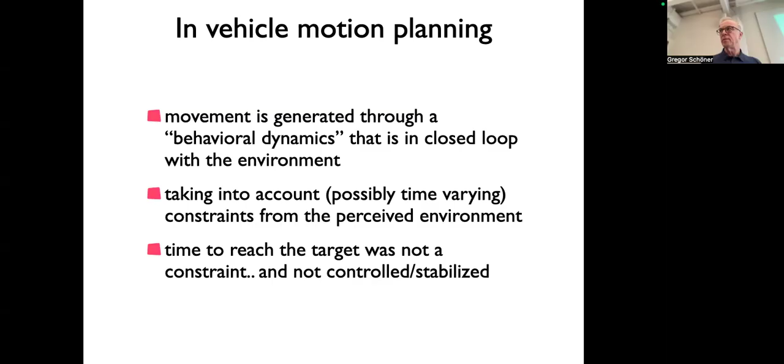So you might think, well, there's already timing in there, but there was certainly not the constraint that you arrive at a particular point in space at a particular time. For instance, if you're held up by an obstacle, you will just arrive later, right? So the speed was an independent controlled variable. That's a very common assumption for vehicle motion, and we'll see a nuance in that later.

In robotic arm movements, classically, we're also thinking about path as path planning. Some of the methods, as you saw when you read that review chapter, are the same—they're just in configuration space. And then time is a parameter, the parameter of how you run through the path.

That's then analogous to vehicles, except that in most robotic arm movements, we're not actually thinking of that time plan being updated, because presumably when you plan the path of the hand, you have the entire information about the environment, where the objects are, and so on. So it's all fixed. We'll see in a moment that's not maybe true for autonomous arms, and then we'll get back to dynamics. I'll make this problematic in a moment.

I'll talk about timing in a more ambitious sense, and that's relevant for autonomous robotics.

So here's a little guideline through what I will be talking about. I will first talk about timing in classical robots—that's really this parameterization textbook stuff—and I do this to contrast it with what is required in autonomous robotics. I'll give you a short survey of approaches to timing in autonomous robots, not in detail, just to make the problem clear.

And then I'll actually expand on how human movement is timed. That's when it will really become clear what timing is supposed to be. It's a quite ambiguous term in English—there's no good German term for that. I'll make that much clearer, define different aspects of it, and define the solutions that were developed in that domain that have to do with dynamic systems.

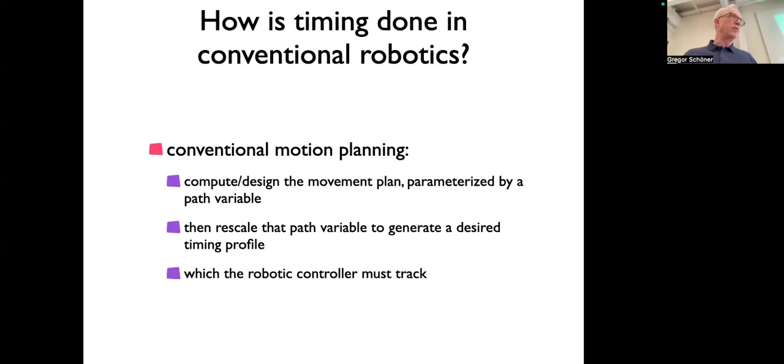And when you design them, program them, actually often people will do that first, that the robot moves slowly to make sure everything's fine, and then they just up the knob and run through it faster. So the way that's concretely done varies.

There are approaches to path planning that are in joint space or in end effector space. That's been a long topic of discussion in human movement, by inspiration from robotics, whether humans plan more in one space or the other. Sometimes a little bit odd, that discussion. In robotics, typically we're looking at non-redundant systems. So there's a one-to-one relationship between a joint trajectory and an end effector trajectory, right, which is invertible. And so it's really more a question of how parametrically these paths are defined.

Typical approaches would use straight lines as paths when there's no obstruction in the space in which you represent the movement. So for instance, if you do it in joint space, a straight line in joint space amounts to a curved path in end effector space, with sine and cosine functions that some of you figured out in the last exercise. Conversely, if you were to plan in end effector space, then you would get a curved trajectory in joint space, right? This is a straight path in end effector space, and that leads to a curved trajectory in joint space.

And it was that signature actually that people were looking for in human behavior, and were finding that human behavior does tend to have relatively straight hand paths in space. And so the notion was that human movement is planned, and again, a bit vague what it actually means, planned in end effector space rather than joint space. And of course, in humans, the joints are not the units, it's the muscles, and so it's not different.

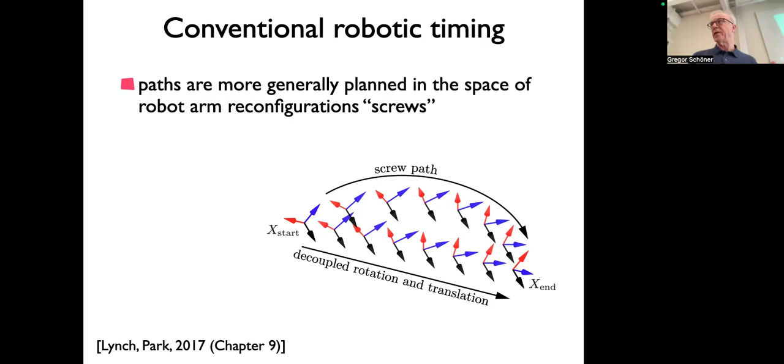This can be generalized, as we discussed briefly when we talked about path planning. You can do it in configuration space, which means you expand it to 3D plus the rotational degrees of freedom, where you have this complication of how to represent that, right? And I'm not formally defining that. These would be the so-called screw paths that capture both position and orientation.

Good. So when you have that, you have a path, right? And the path is typically described by a path parameter that tells you where you are in the path, depending on the mathematical approach you use. And you can replace that by time, by some scaled function of time, some monotonic function of time as that path parameter, so that you do advance in the path, you don't go back, but you can vary the speed with which you go forward.

And this is done in classical planning just by using simple polynomials in time. And you can determine the parameters of these polynomials so that you get from the starting point to the end point in a defined time. You essentially have to find the zeros of this. And in most cases, one is actually going to a fifth order description, because the constraints are not just that you have a starting point in a given time, but you also want to have zero velocity initially, zero velocity finally, and maybe even zero or very small acceleration initially and finally. So you have a smooth landing. And it depends on these constraints whether you use 3 parameters or 5 parameters to get this right.

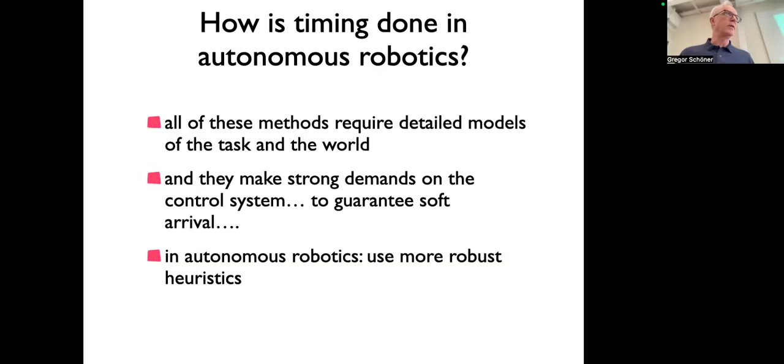And I want to highlight a few things, just to give you a flavor, that have already solved some of those problems. And the theory for that is not perfect. And later we'll see what the more advanced theory is. So a very influential person in that field is someone called Koditschek. I actually hesitated to have you read one of his papers, but then I decided it was a bit over the top. A research paper, a review paper, the general paper we wrote recently about all these problems.

So he did one cool thing. There was a version that was a juggling robot. So this earliest one was just a robot that had to keep a ball in the air with a paddle. And it was uniquely simple in a way. To keep the ball in the horizontal plane, if you think about the vertical and the horizontal, there was a simple control rule where the ball was observed, I think, by a camera. I don't remember. It was very simple, like a ball that you could segment easily, white on a black background, something like that.

And so it was able to look where the ball is horizontally, and then simply if it deviated from a desired region, it would change the incline of the paddle at impact. And to keep it vertically going, it did something like a resonance idea. So it actually moved the paddle periodically, and it made a model of the ball's trajectory. The ball was given an initial impulse, and the paddle essentially transmits an impulse. It will fly a certain amount of time. It depends on how much impulse it has. And energy is used up, it goes down.

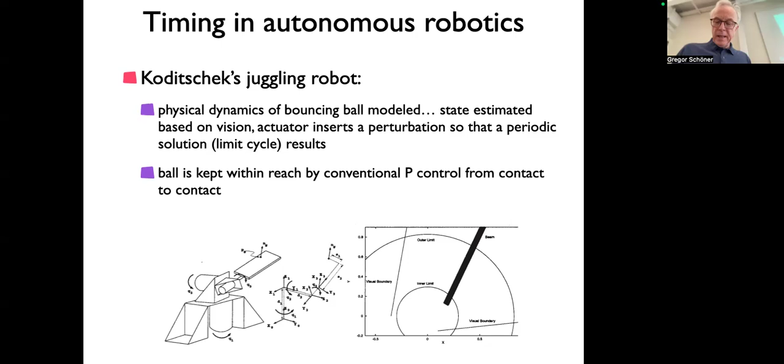But that was a paradigm. And a related piece of work, I actually don't know who has priority there, is Raibert. They're both very famous. Raibert's hopping machines, hopping robots. Anybody heard about these? One-leg hopping machines. He wrote a whole book about that. He was a professor at MIT. He's the founder of the Boston Dynamics company. And if I'm lucky, I can show you a video of any of his current robots, I mean, of the team. I'm not sure how involved he is now in the company.

And so that was analogous in the sense it was a device that had, it wasn't a paddle, it was sort of the inverse. This robot had to stay in the plane, and it would stay in the plane. It was just jumping, extend its leg abruptly to give it upward momentum, and by controlling the angle of the leg, single leg, it could control any sideways problem.

And to keep up in the air, it simply has again to model the motion of that object under free fall with the injection of the vector momentum it gets on impact to keep it going, right? To be in a periodic orbit. And that worked perfectly well.

And that is at the core, much more elaborate, of all these walking machines that he has. You can see this already gives you some form of robustness because it doesn't actually have to have a precise injection point of that momentum. For instance, if the robot is hopping along and suddenly there's a step and therefore it will get the momentum earlier and maybe in a slightly different direction, that will just phase shift a little bit the oscillator.

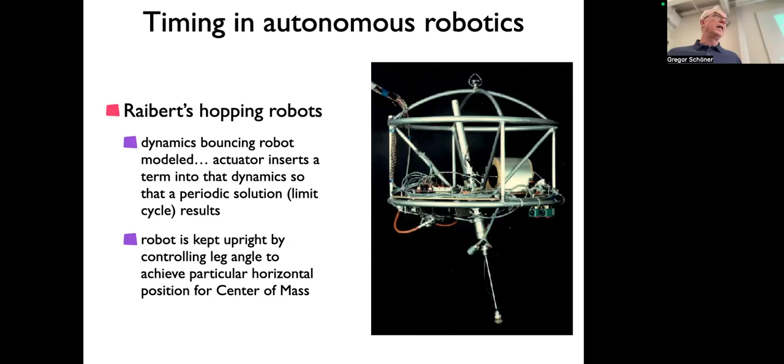In some of these more modern versions, these robots can do just that. They can walk over rough terrain because they're just doing their periodic motion. And if the cycle is shortened or lengthened, and there's a certain perturbation variation in the exact momentum that they get, they can tolerate that. Now, that was the core principle.

So Koditschek made a whole theoretical notion about that. A notion that there would be a macroscopic model that is this sort of model, and then you would translate it down in more conventional terms to the detailed arm and all the controllers that you have downstairs. And so downstairs, it will be more like conventional robots with control circuits and so on.

And the concept would be that you describe the whole lower level as an oscillatory system that has some effective eigenfrequency and damping and so on. And then that coupled to the task constraint would then create the macroscopic timing function. So if you look into these systems, they have a lot more components. It's more complex. I'm not going to explain that exactly. Actually not all of it is public. Some of these robots have proprietary controls. We don't know exactly.

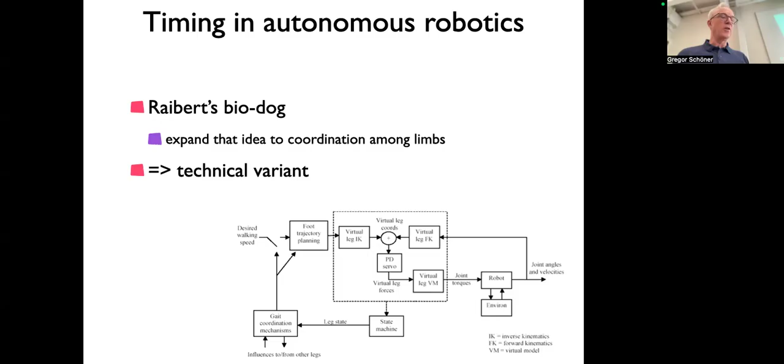I have here one video. I hope it works. I'm going to check that. Except I have it on the wrong screen. You're familiar with that, I think most of you are, right?

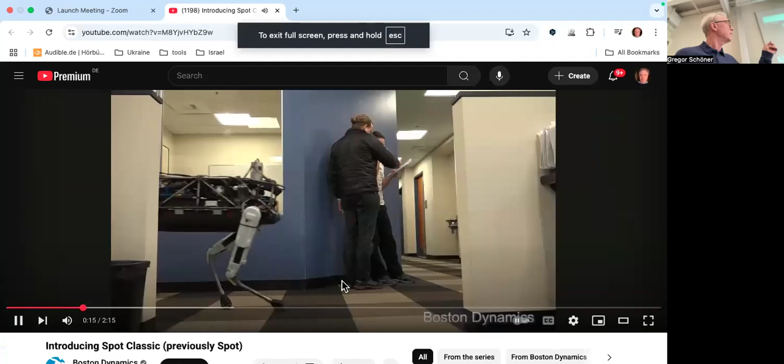These dynamic machines. And so every leg here has that component, has a periodic device that does that. And then there are other controllers for lateral control. What you just saw is a combination of two things, right? It is a horizontal perturbation. So the system has to control that it's again back over the right position, but also all the legs have to stay in their rhythm.

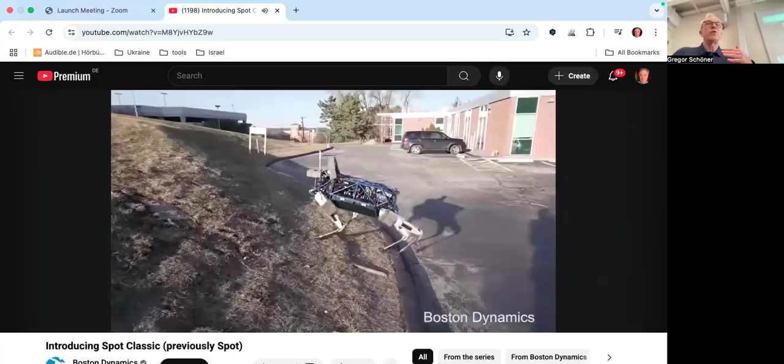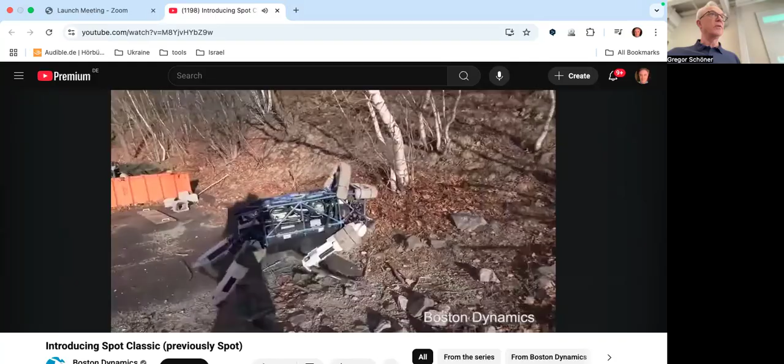So this is not a one-leg hopping machine, it's a four-leg machine, and they are coordinated. And this means that the sequence of the timings must be right. And that's actually achieved by coupled oscillators. We will come back to that later. So the feature is it runs over rough terrain, right? It doesn't have to make a precise analysis of where the leg falls and so on, because it has this inbuilt robustness of the periodic locomotion mode.

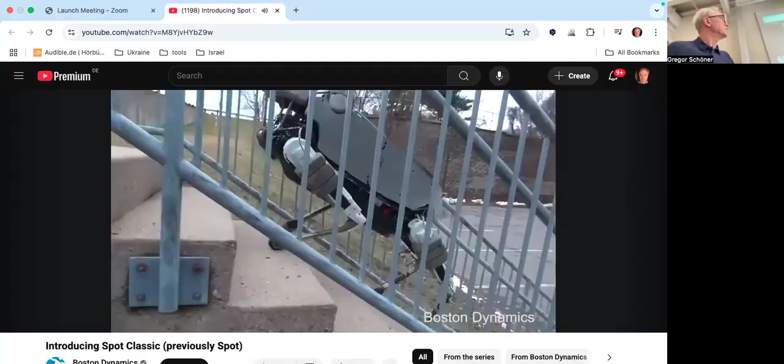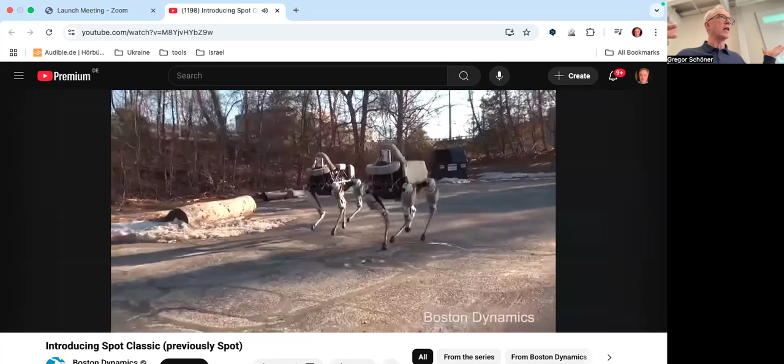You see that, right? And sometimes it misses a step and so on. It doesn't have a model of the staircase. It will just keep the time. This is actually remote controlled in the sense of the path planning. As we discussed, this is actually not autonomous. There's a joystick guy who's driving it, right? But there are versions where they do also something like vision integration.

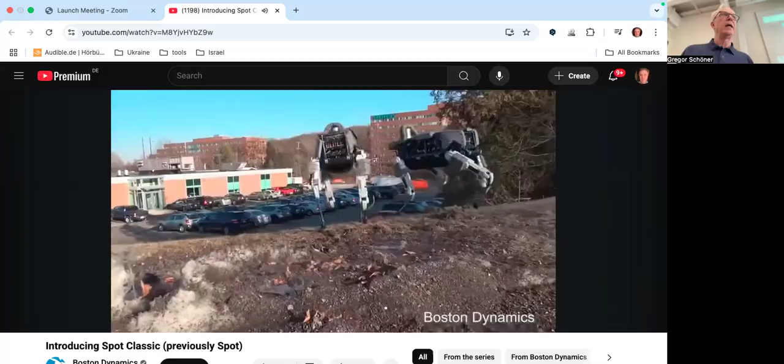Now, there are even cooler things they do now with jumping over obstacles and so on. Each of these is actually a lot of effort to really get going. Okay, there are lots of videos like that. I invite you to have a look at those.

No, I think, how do I get back to my full screen thing here?

Now, in human movement, we didn't really talk about that so far, but when we're talking about reaching movements, discrete motor acts and so on, in some sense these can be done in open loop. You can actually estimate that there might not be enough time, neural processing time, to make a feedback loop while you're making the movement, when you make a fast pointing movement, for instance, or a fast catching movement.

And so in some sense, it is possible to make an open loop movement where you just generate the plan or time course in your brain, right? And you just send that downstream. There's a lot of work currently showing that's not typically the case, that you do have feedback corrections, but that extreme case is possible. And for a long time, that was the dominant thought, that it's open loop dynamics.

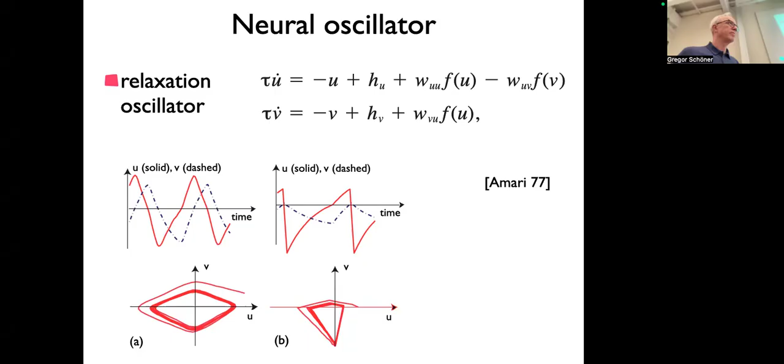This is a whole mathematical field. It's very fun. The Scheinerman book that I mentioned discusses that, but you don't need that. Just to tell you, so you've heard about it.

So these kinds of models do actually account for this difference between clock and motor variability and the reaction time and so on. The details are in that paper if you're interested. It's too specific in my view to discuss here. Good. So that's absolute timing, and we are good at absolute timing.

Now, there are whole other domains in perception, for instance, pitch analysis and so on. We're also using things like that. There are certain circuits that enter in resonance with temporally varying signals. Now, relative timing is very closely tied because we are pretty much always coordinating. So intuitively, when you locomote, we are bipeds. So for us, it's really critical that the interlimb coordination works, to not fall over, even though you can jump, right? You can move with both legs.

We also have intralimb coordination. That is, the joints are all periodically varying, and make sure that, when the knee is bent, you're in a certain phase of the cycle. And if you stumble, then you try to recover that timing. Speaking is an extraordinarily well-coordinated act where the articulators have to go to the right place, anticipating again at the right moment in time.

This has been studied in a lot of detail. There are phenomena there that are called co-articulation, where you're essentially anticipating that for the next phoneme I have to go there, so I'm already positioning myself to do that right, and do the previous syllable a little bit differently depending on context. So this shows a little bit the subtlety of anticipation.

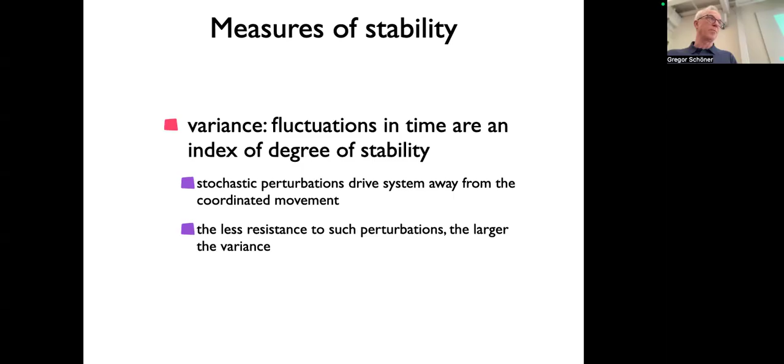Or relaxation time will increase. That is, if you look at how long it takes to go back to the attractor, it takes longer when it's less stable. We didn't really formalize that in the tutorial, but it's obvious—I'll come back to that.

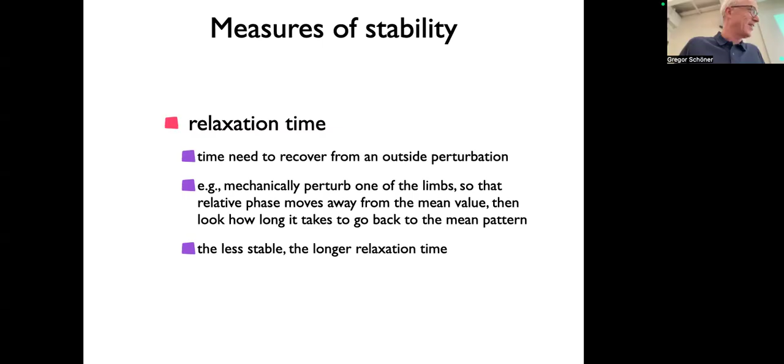I actually thought that was not going to be true—so it was like an attempt to refute the idea. But he went back to his lab and did it with someone called John Scholz, with whom I ended up working a lot. Unfortunately he died a few years ago, of cancer.

It was beautiful work where they studied the variance and also studied relaxation time—that was the heroic part. They had the fingers mounted this way for some reason, and then mounted them in an apparatus where a motor would perturb the finger somewhat strongly, because if you don't perturb strongly enough, the clock isn't reset and it's just mechanics. You have to give it a little startle, but not rip off the finger.

They found that as you increase frequency, the variability of relative phase—the standard deviation estimated across time—increases for antiphase but not for in-phase. After the transition, it drops to the in-phase pattern. And the relaxation time increases and then drops to in-phase at the same time.

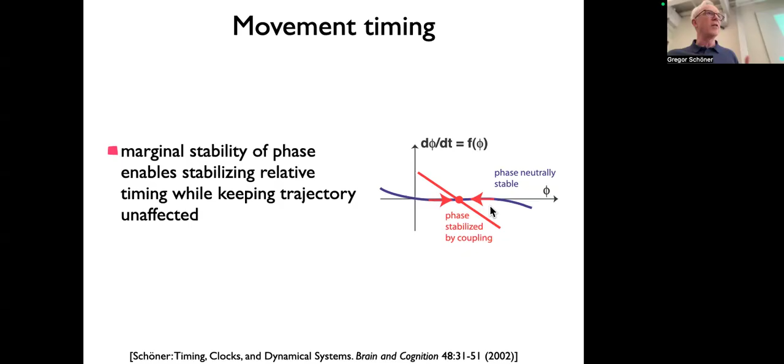If it's symmetric, then it will make in-phase and anti-phase, but it can also make other phases. If one oscillator is a little bit faster than the other, then it will make some other effects. That's sort of the generic principle of how that happens.

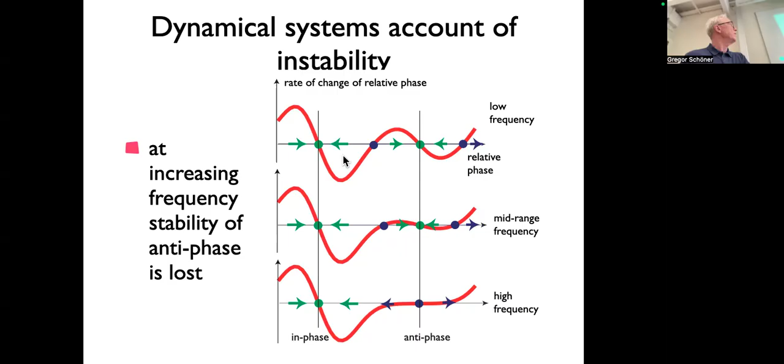You can then derive from coupling functions like that the resulting dynamics: the rate of change of relative phase as a function of relative phase. So it's a dynamical system with relative phase as a variable, and that can be derived from these oscillators. You have two attractors, the in-phase and the anti-phase, and the anti-phase becomes unstable.

If it becomes unstable, the slope here becomes smaller, and that will lead to fluctuation. So if you think of fluctuations as random insertions into the rate of change, this curve goes up and down stochastically, like this amount of noise, and that will translate into little noise for relative phase when the curve is steep, and more noise for the relative phase when the slope is flat. That's why when it's flatter, you have more fluctuations. Similar logic applies for relaxation time.

The linear approximation, remember, is the relaxation time. It takes the exponential time course that's given by the slope to relax. When the slope is smaller, it just takes longer to relax for the same distance. That's how, as you go to instability, the relaxation time goes up.

It's sometimes called critical slowing down and critical fluctuation. That comes from the analogy with phase transitions in equilibrium physics. It's not exactly that, it's more a metaphor that's sometimes used.

So that is sort of empirical proof that this picture of coupled oscillators is good for coordination. In the meantime, this has been done 15,000 times in all kinds of variants. You can also see that people follow metronomes and see the same phenomena. They go out of syncopation.

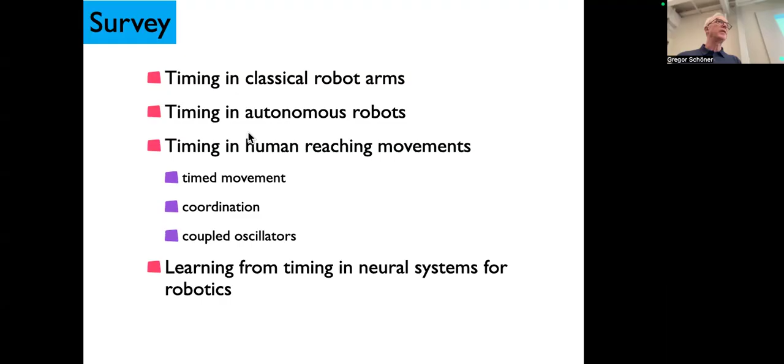So my last couple of slides are about learning from that for robotics. It's a little bit the more precise versions of what I showed initially.

And then if we're getting close enough to the final point, we turn this one on and this one off. And that's how the discrete aspect comes about. And while this is going, we are making sure that it is coupled to some sensory input that makes it exactly do the right thing. I'll show you some simulations here.

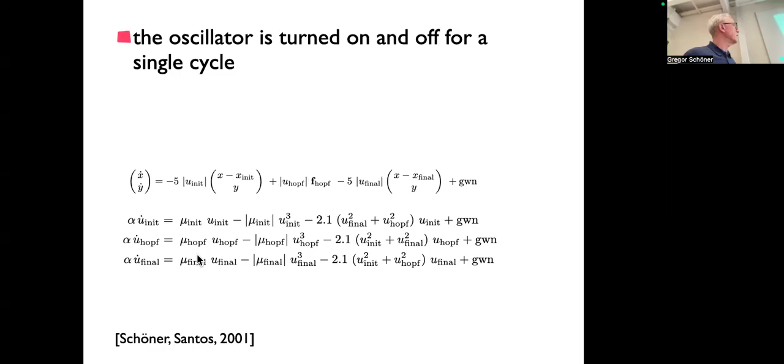So the switching is also done by a dynamic system. It's sort of a neural dynamics in a way. It just does the switch, we don't have to understand that fully. So here's an example of this going. For instance, here, the positional variable that will be driving the paddle.

Which sets the ball is here, this black line. Velocity variable is the other one. The neuron switching the movement on versus off, right? These are the positions, initiation and termination of the movement. And from that, we create some inner variables that represent whether you are currently in a movement state or not.

And then you can show that this can work with perturbations. So for instance, you have an estimate of the time to contact - you want to intercept the ball. The time to contact would be the time it takes the ball to reach your paddle if it goes at constant velocity. By having sensory errors, we insert noise into this, but in an experiment, you would potentially have the ball accelerated by air or obstacles, or it could just be sensory error. And what we want the system to do is be robust under that.

There are a couple of examples here where there would be real perturbations, where the time to contact is predicted to, for instance, reach zero here earlier than predicted. And that would then drive these variables around. The end point was not as predicted due to the accumulation of such error. But the system still does then hit the ball at the right time.

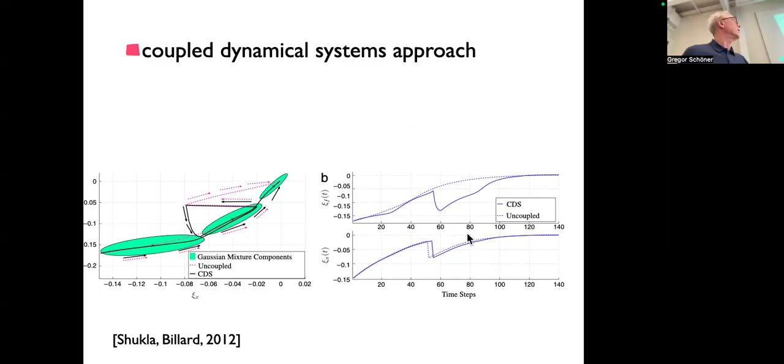And I think that this movie might work, except that I might have to do this by hand because I think I didn't insert the code here into the slide.

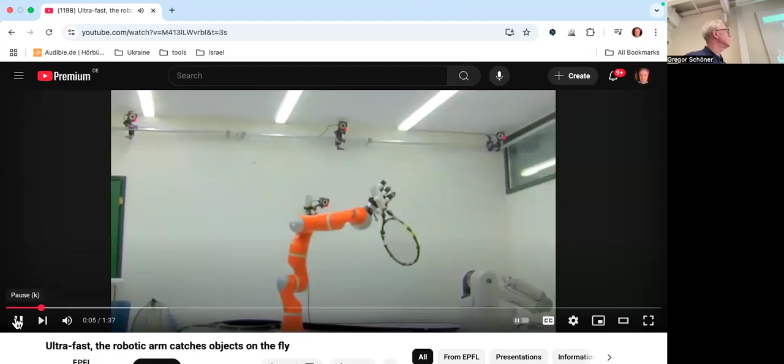Yeah, this is the robot. This is the arm catching bottles. Is it superhuman, by the way, how it predicts? No, I think they're just talking a lot. But at some point, this is Aude, who invented the system.

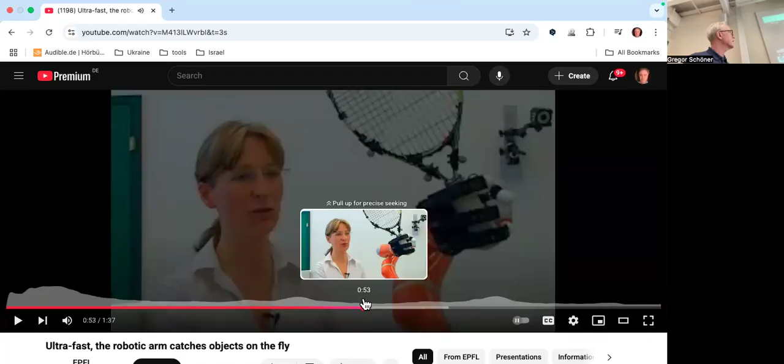Oops, again, I have this problem. How do I do that? This. Yeah, there, I'm back to the slides.

So we have a version of that which is theoretically much simpler and cleaner in a way. It doesn't have all this learning stuff. That was published a little later, but it's of course not as cool as their stuff. That illustrates this idea. So we did it with our little robot, the old one, which is very slow and can only make very slow movements because it's a very bad robot, frankly. A modular robot we built ourselves.

So let's see here, this is what it looks like. Quite an awkward robot. And because it was so slow, we didn't do catching. We did intercepting a ball that runs down a plane so that it has time. In fact, even the fastest movement would not hit the ball very hard. Aude Billard had the cool lightweight robot arm that we now also have. This is decades ago. It was published 2013, but it was done maybe 2005 or so. So it doesn't reach performance at all. But here you can understand a little bit better what happens.

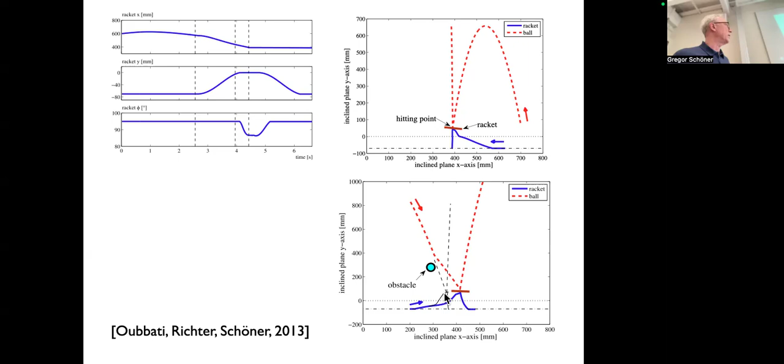And so that can do two kinds of robustness. In one case, we have the ball come in here, we insert it here, not by hand, so it's really a measured time to contact, and we hit it. And in another case, we have a little obstacle where we deflect the ball a little bit, and it just has to adjust its parameters and also its timing to move to the new position and hit at a new moment in time. And that is demonstrated here.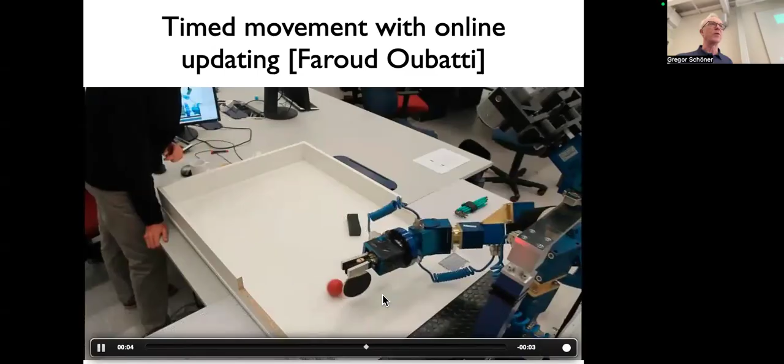It's very slow, but that makes you see what happens. You will see that initially it tries to go here, and now it updates. Right? So initially, and then it corrects. Because it's slow you can see it, but of course it's not extremely cool. But it's sort of the same idea as the bottle catching, except this was all tuned by hand, with parameters we determined ourselves.

The other thing is that it can also do this at the level of decision making. This is something I didn't really explain, how these neurons that turn on and off the different phases are also dynamical systems that go to attractors, and we can switch those attractors around. So this was a case where we inserted the ball. This would be the normal hitting, and then we had it interact with an obstacle that would make it move away again. So there's no time to contact, and the paddle would go back to its home position, give up on the reach.

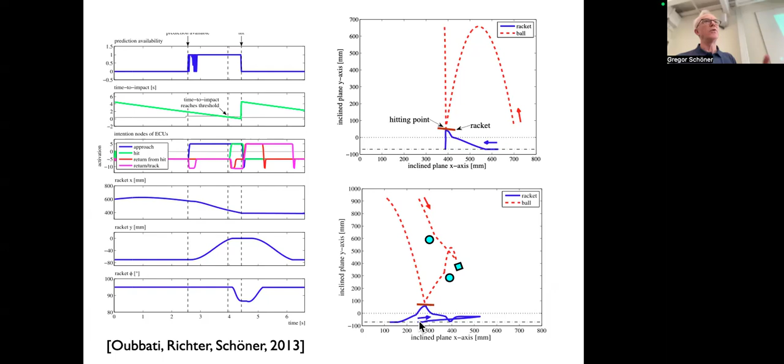And then when the ball falls again, it goes to a new interception location. So you see that here. It goes back to baseline, and now a new reach is inserted. You see how weak the problem is. Yeah. This was Faroud Oubatti who did that.

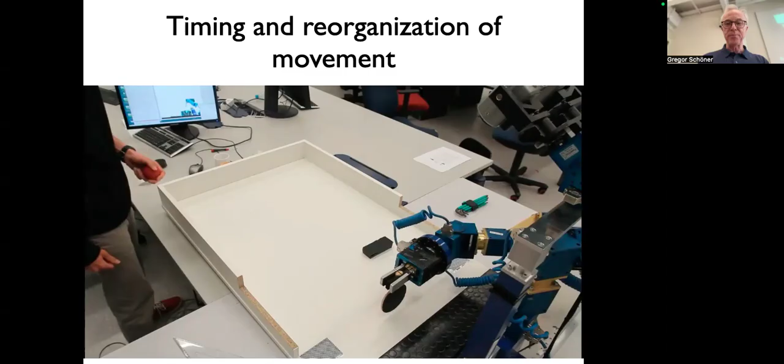So in autonomous robotics, timing is best framed in these terms: stable oscillators that are coupled for coordination, both with perceived events and across different limbs. That gives the timing the robustness you need. And the interesting thing is it works both for rhythmic movement and locomotor systems, which are just rhythmic, so they don't have this whole issue of turning movements on and off. But you can also do this with discrete motor acts. I didn't explain exactly how that works, because that requires neurodynamics, which I taught in the summer semester, and how to turn things on and off.

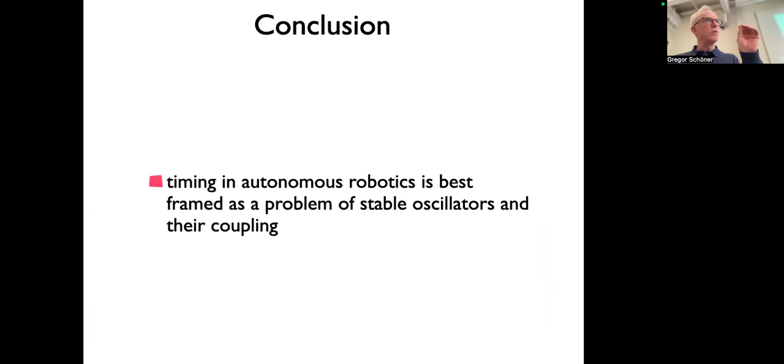You could emulate that with an algorithm, like a finite state machine, but the critical thing will be to stabilize against noise, because with sensory noise, as I showed here a little bit, you're uncertain about what to do. What you have to do is stabilize the decision, say either I go or I now go to another state, and not undo that decision. Otherwise you would switch back and forth 15 times. But the dynamical system makes that a steady state. That's why it's important to make these decisions about going or not going also dynamical systems with stability properties.

That is actually routinely done now by roboticists, for instance with robots that interact with matter. Sami Haddadin, for instance, does this now in Munich; he used to be in Hanover, where they are interacting with surfaces. When the robot detects that the surface ends, it has to switch to a new control mode where it no longer presses against the surface. And that detection is noise laden. You get some signals, and near the decision you're uncertain whether you're on the table or not. You need to make a decision, and once you're there, you need to keep it. If not, the robot will get into some unstable state where it tries and then switches back and so on.